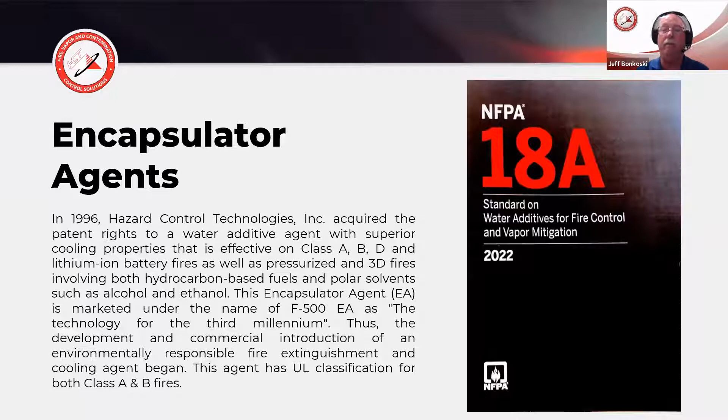So it's this new technology, and it's covered under NFPA 18A. So we do fall into a standard. It's a standard on water additives for fire control and vapor mitigation, and it was recently updated. Here I show the 2022 edition. In this 2022 edition, I believe it is the only standard with NFPA that has annex material that speaks about the use of an agent on lithium-ion batteries for fire control. So we are now in a standard that can address some of those problems.

Within this standard is Section 7.7. It's a minimum test that we go through that shows that we create spherical micelles that are stable in the presence of high heat. So this test in 7.7 is a way to evaluate how the additive F500 is able to render hydrocarbon fuels non-flammable through encapsulation. And we'll talk more about this as we get into it.

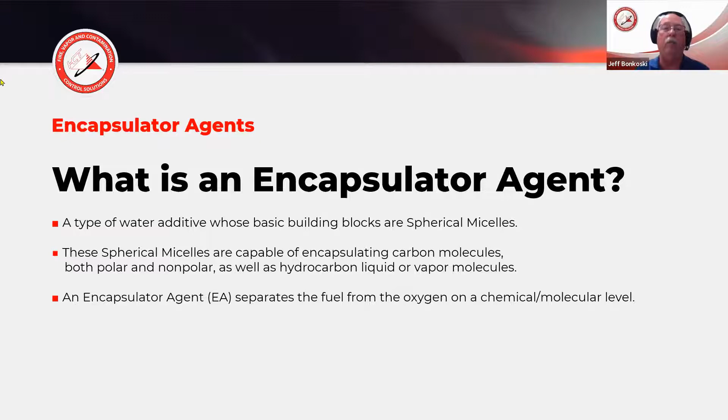So as I mentioned, our basic building block is a spherical micelle. It's not a bubble. It's not foam. Foams work as a separation between the fuel and the oxygen on a mechanical basis. When we look at how a spherical micelle works, we're doing that separation of fuel and oxygen on a chemical, molecular basis by encapsulating. In order to really understand how that's accomplished, here is a real quick video.

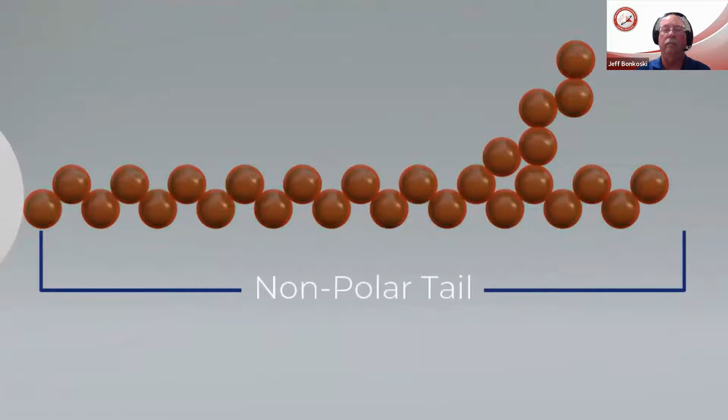Encapsulator technology, the next generation of fire and hazard mitigation. First, we start with a simplified version of a single encapsulator agent molecule consisting of a hydrophilic polar head which loves water, dissolves in water, and a hydrophobic nonpolar tail which fears water and will do anything to get away from water. Once the EA molecules enter the water, they instantaneously and automatically orient with the nonpolar tails inward and the polar heads outward, forming millions of spherical micelles. Micelles travel towards and exit the nozzles, forming EA droplets. Micelles nearest to the surface of each droplet automatically break apart. The nonpolar tails orient outside the droplet with polar heads on the surface, forming an EA skin on the surface of every droplet.

In addition to the EA skin, there are millions of molecular spherical micelles within each droplet.

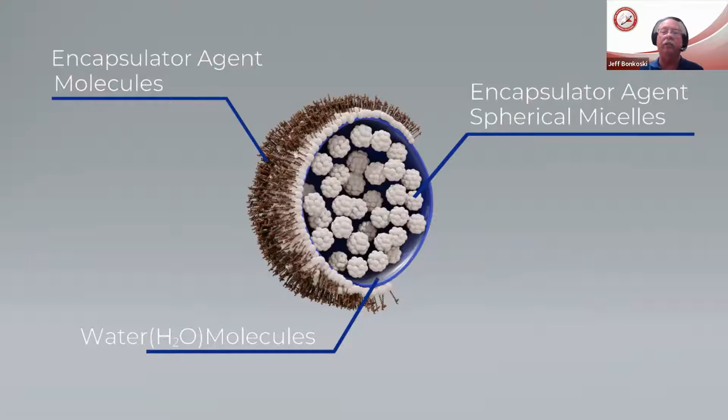So these spherical micelles inside each and every water droplet will perform a function, as we'll see. They're very important, but if you watched any of our other presentations, you understand that the skin we put on the surface of the water droplet actually changes the way that droplet is able to cool and extinguish fires without the creation of heat. This presentation is on spill control, so now we're going to talk a little bit more about what these spherical micelles within each and every water droplet are going to do.

To give you a visual idea of how many of those spherical micelles are within a water droplet, we came up with this to help you visualize. If that water droplet was the size of the Earth, a spherical micelle would be the equivalent to about the size of a pea. So just imagine how many peas you can stick inside the Earth. There's quite a few. So there's millions and millions of these spherical micelles within each and every water

droplet, and what they're going to help us with when we start dealing with different types of situations, fires, soil remediation, spills, is rapid cooling. If we have some type of an ignition source, something that's heating up, that could possibly create a fire situation around flammable vapors or flammable liquids, we can cool those ignition sources. We can encapsulate those fuels and reduce the toxins that are being released when fuels are being burned.

And everybody today is looking for that fluorine-free solution. F500 is that solution. We are fluorine-free. We've been tested by an EPA-approved lab, and it was actually tested for 25 different fluorinated ingredients. The results came back that we had 0 of the 25 that were tested for.

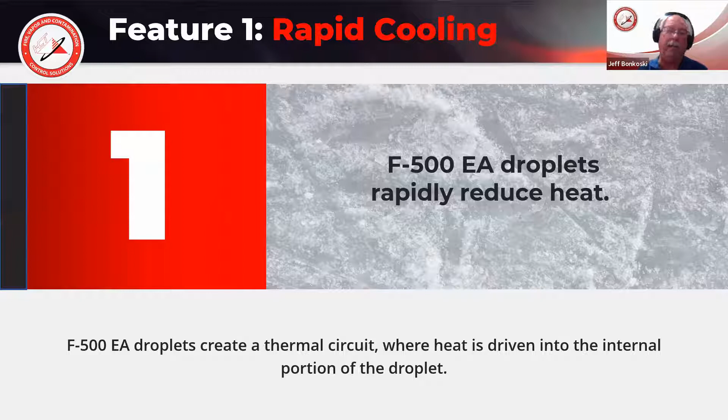So when we start looking at these droplets and how rapidly they reduce heat, again, think about those tails that were on the surface of the water droplet. Those tails act like a heat sink. They drive the heat inside of the water droplet where those millions of spherical micelles are. Those spherical micelles within the droplet rapidly absorb the heat, slowly releasing the heat into the water that's around it.

But through that process, that water never reaches 212 degrees or creates steam. So there's no longer those issues of firefighters getting steam burns, or if we have victims within structures, them getting steam burns as well.

So also, because we're able to cool, if you have a tank truck fire, if you have a fire at some type of a facility where you've got sources that will absorb and hold the heat for periods of time, until that heat is dropped down below auto ignition temperatures, you're going to have that constant worry of a reignition of those liquids until you get down below that auto ignition temperature.

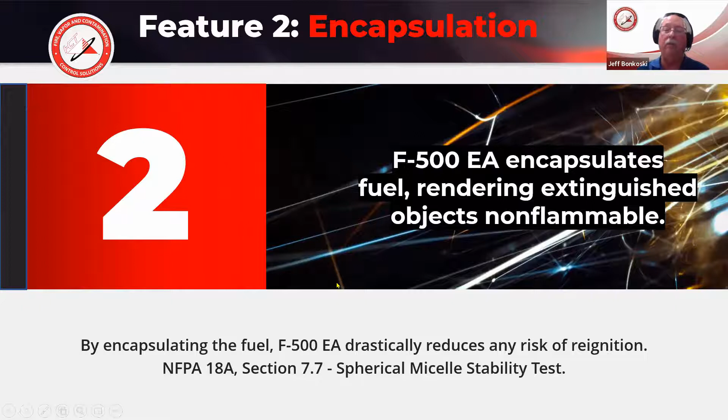So what we're going to do now is talk a little bit about that 7.7, that spherical micelle stability test, and how it's able to reduce the risk of ignition. We need to understand when we see this test, there is a formula. There is a guideline that we have. It's 1 part of F500 encapsulator agent, 8 parts of fuel, and a minimum of 40 parts of water, or a 1:5 ratio. If we want to look at the solution, it's a 2.5% solution.

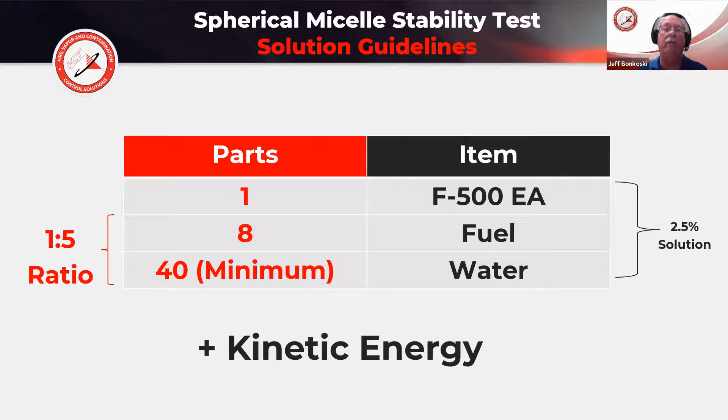When we look at most of our fire apparatus, our inline eductors, our proportioners, they usually go to 3%. So there's a bit of a safety margin in there. The kinetic energy is going to be that water splashing on the ground as we're trying to treat an area that may have encountered a spill. We're treating the ground. The kinetic energy is going to be a requirement. And as we see here in this video,

This is the spherical micelle stability test. Each and every batch of our product before it gets paled goes through this test. This is the NFPA 18A 7.7 test, and we start with a gallon of a flammable liquid, gas, diesel, jet fuel, whatever fuel that we want to test with. We use 16 ounces of encapsulator agent, and we pour that into the pan, and then we will measure out 5 gallons of water.

The kinetic energy that I mentioned earlier is going to be that water that we add as we are timing. The kinetic energy is the water splashing into the pan, and as we can see, we kind of use it to mix it up. So that gives us that kinetic energy that we need to help with the encapsulation. So he's going to time this out for the 5 minutes. I'm going to speed this up just a little bit.

As you can see, there is a milky white discoloration to the water. There's not a lot of bubbles because we don't work on that basis. We work on, again, a chemical molecular basis, not a mechanical basis, making foam bubbles. After he adds the water, though, because there could be some minor frothing, some small little bubbles that might form in the process of adding the water, the solution is allowed to set now for 1 minute.

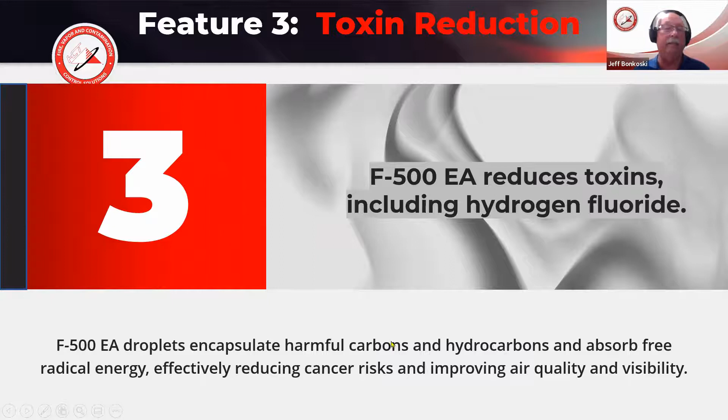And we sit there and we start looking at our firefighter trade magazines and everything. We know that we have lawyers looking for clients in the fire service that have been exposed to our current foams and things that may have been a cancer causing agent that we've been exposed to through our careers. Now, when we start talking about that ability of an encapsulator agent to reduce those carcinogens, it's based on a Clemson University study.

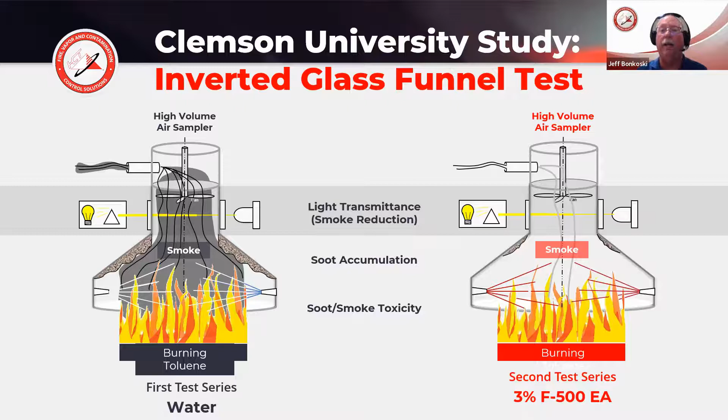And what was done is they took an inverted glass funnel and they ran a series of tests using toluene as the fuel source, spraying plain water through the hood into the smoke column. They weren't trying to extinguish the fire. They were just spraying this water into the smoke column. And then they did a series of tests using a 3% solution of F500 encapsulator agent. Again, spraying through the smoke column, not trying to extinguish the fire.

They found from the use of F500 that they were able to improve visibility by 68%. The accumulation of the soot was reduced by 97%. But where the carcinogens are, the toxins, the things that are killing firefighters, there was a 98.6% reduction in the toxins, which is huge. I know of no other agent that we use in the fire service that can show us these types of results in reducing the toxins and the things that we're exposed to.

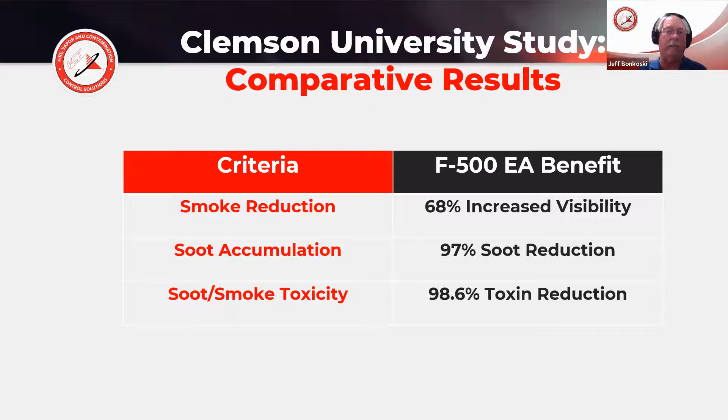So all the things in the fire service that we're currently doing, you know, our second set of turnout gear, our particulate hoods and all the other things, we're being reactive to a problem instead of proactive, where we can now look at an encapsulator agent. Okay, why aren't we being proactive in reducing our exposure to these toxins and these products of combustion as we're entering into these structures?

So as I go on, we look at F500 EA, it extinguishes all classes of fires. You know, the A fires, the B, the D. And let me say, when I say B, it's 2-dimensional and 3-dimensional. And again, I throw out that foam Annex A11 stating foam cannot work on those 3-dimensional fires.

The other problem is the current foams, the fluorinated ingredients. They're not only dangerous to the firefighters, but also to the environment. And I know there's many states that have banned their use. They've done buybacks from the fire departments to get them to stop.

Some states are treating any incident that might involve the use of a Class B foam almost like a hazmat incident, where if you use the foam, you need to write up a report. The report needs to go to the State Department of Natural Resources, and it may have to go to the health department. They're keeping track of this, I'm thinking, for multiple reasons.

And one of them maybe is if, let's say, that Class B foam gets onto some private property, and years down the road, maybe there's some even more strict requirements that come about, and now they find out that that private property is contaminated and needs to be cleaned up. Who do you think is going to be the one responsible for those cleanup costs? It's going to be the fire department that generated or caused that contamination.

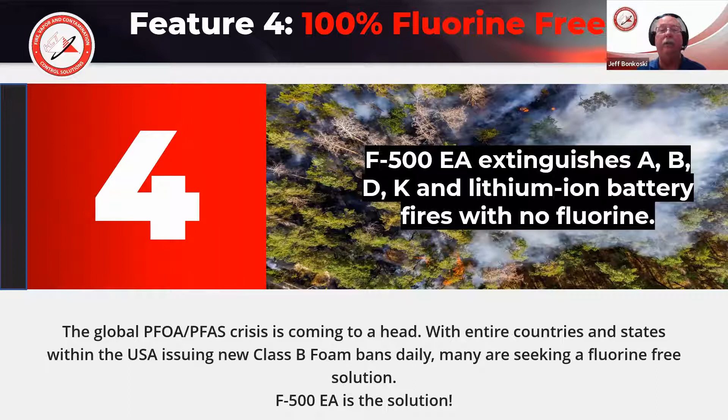So we need to not only think about today, but we need to think about the future as we continue to use these fluorinated foams on some incidents that we're being called to.

So the applications, when we look at encapsulator agents, are basically all the different classes of fires again, and it's polar as well as non-polar. You know, the D, the Class K, transformer fires, lithium-ion battery fires. Our list goes on.

Solar panels, all the things that we seem to be embracing, and all the technologies that we seem to be moving towards to help us save energy or be green, as we say. We're looking for solutions to stay green, but yet we're not really looking at agents to be able to deal with those types of fires.

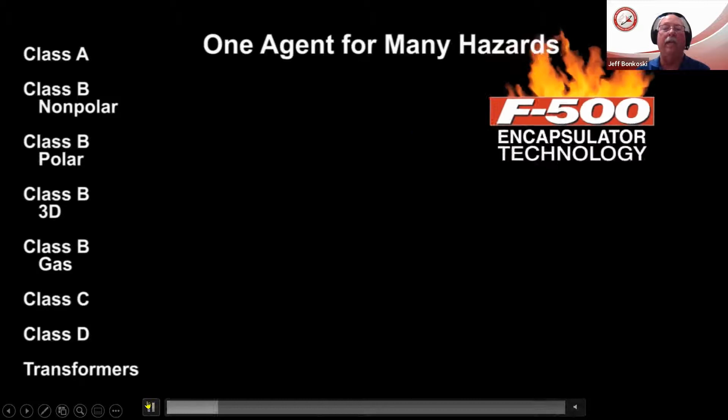Here we have a quick introductory video. Hazard control technology. When we watch this, one of the things that I point out is that if we look on our screens to the left side, it's going to show that encapsulator agent works on all classes of fires. Okay, so we're not having to carry multiple agents on our apparatus.

We look at this fire. I'm going to stop it here for a minute, because here we have a lot of fire. And I mentioned that ability to encapsulate and reduce those soot and toxins. Here's an example. You still have a lot of heavy fire on these tires. Where's the black smoke?

We started to have an effect on reducing that soot and the toxins that are being released by this fire, cleaning up and making it safer. And it does the same when we start looking at our structure fires. But you see here how it works on being able to do just that.

And when you watch these videos, you'll watch video after video where we have chemicals or we have soot, we have smoke that's heavy black because of the materials burning, but yet we're able to quickly and easily remove it. When we look at Class B fires, you often get the special application technique. There is no special application technique other than aggressively fight the fire.

When you watch videos of firefighters doing extinguishing, here's a good one. He changes his water pattern. You see him open a little bit from spray pattern with power cone, but he changes his spray pattern to accomplish what he's doing. He's looking at doing multiple things.

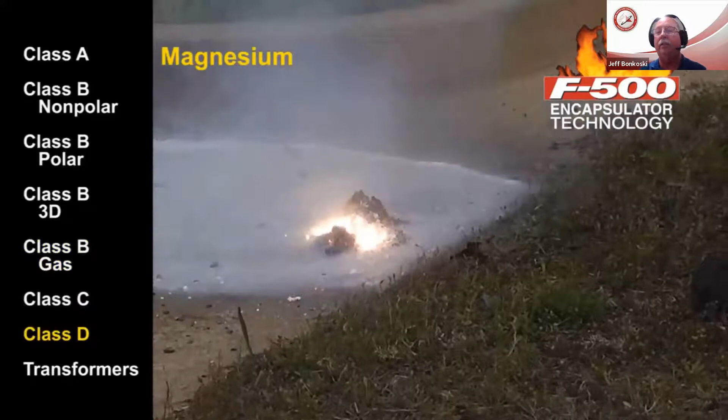Class C, stored energy, lithium-ion batteries. We hear water's the solution, but yet how many times when water's used do we hear about reignition, or 30, 40,000 gallons of water, but we didn't put the fire out, it burned itself out. What about all that runoff? Class D metals. Again, about 380 pounds is in an average vehicle.

Transformers. As you watch this, you'll see that the transformer is not arcing and sparking. Okay, it has failed. So it's now a Class B fire in a Class C environment.

But just a real quick idea of all the different situations that you could safely use this in. And I want to talk about one other thing here. Let's talk about a tank farm fire. I just threw together a little timeline. I kind of got rid of some of the information as far as where it's at, because it's not so much where it's at.

Here is a case history. This started on March 17th. The year doesn't matter, but at a facility, there are 15 storage tanks. There are 3 rows of 5, and right in the middle of this farm, on a Sunday morning, they ended up having a situation. Okay, now it started on Sunday.

Next one goes to Tuesday, and they're talking about the fire crews. They're switching attack modes to try and get control of the blaze. And it's continuing to burn. Day 3, and they're starting to have row fires. Now it's up to 8 tanks that are on fire, because water and foam is not being effective on dealing with a 3-dimensional fire.

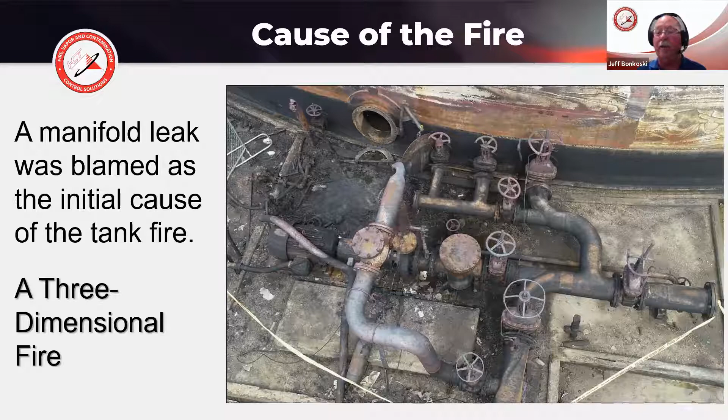The cause of the fire, a three-dimensional fire, was a manifold, is what they initially believe. A fire that, as you can see, for multiple days with foam they were unable to extinguish, yet an encapsulator agent could have been very, very effective. It could have used much less to extinguish this fire and bring it under control, which would have prevented that large spill that caused environmental impact, not only to the bayou, but, as mentioned, into the shipping canal.

So we start to look at the advantages of F500 for use as spill control. And while it's not really listed in here, I'm going to give you another case history as I continue on through. But when we look at the principles of applying it to hydrocarbon spills, right now we're using kitty litters, we're using other types of absorbent materials. They have to be disposed of. In most states, they have to be sent to a disposal site that's approved for these types of chemicals or liquids.

And we understand that the fire department's name, or whoever is disposing of those, gets put on that disposal ticket. So years down the road, if something happens at that disposal facility, it leaches out and people start suing and there's class action lawsuits, they start naming everybody that had anything that went into that landfill. So if you start sending these kitty litters and absorbent materials off to these landfills, you could end up still being responsible.

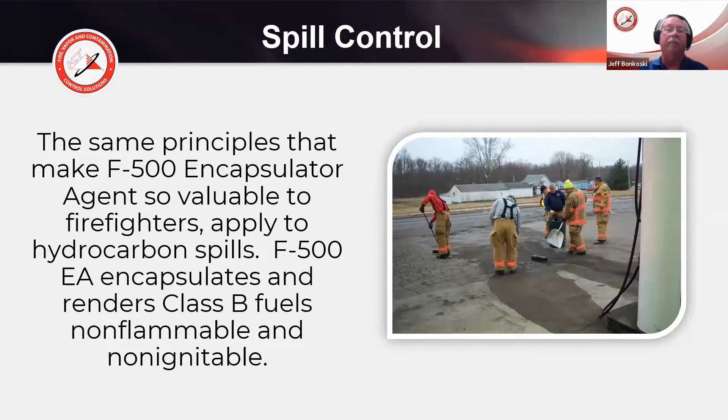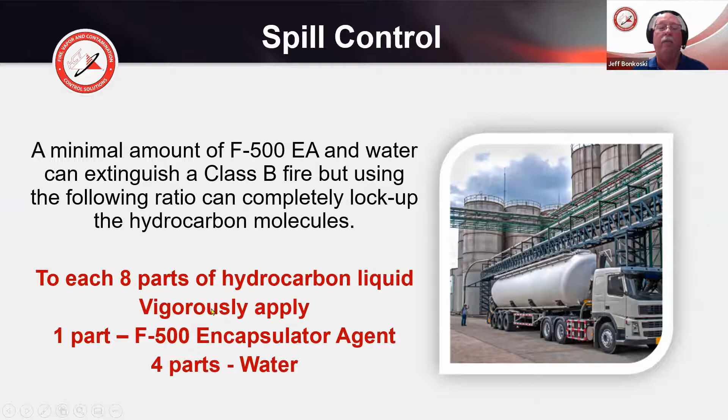Again, minimal amounts of water, depending on the size of the spill. I mean, in some instances, it may not be economical, but in most cases, we look at the formula that's 8 parts of the hydrocarbon liquid, and going to vigorously apply that F500 solution to get that 1 to 8 to 40 mixture, so that we can encapsulate that fuel and render it non-flammable.

When we start looking at these tanker truck fires, and again, being part of hazmat, I've had experience when you start dealing with these. You call all of your mutual aid partners, asking them to bring their foam. You're calling your local airport and seeing if they can bring a crash fire rescue truck. And you're trying all of these things to try to extinguish the fire. And finally, after hours, you finally get the fire out. And you're thinking, you did a pretty good job.

And then you look at some of the news footage. Maybe there's a helicopter that flew over the scene. You start looking at the videos that they shot. And the only thing that you see is the steel skeleton or the steel frame of that tank truck. Okay, the aluminum tank is melted away. So in actuality, you didn't put that fire out. It basically burnt itself out. You had little effect. You spalled the concrete multiple inches and closed down multiple lanes of a highway, so that they can be torn up and

replaced. How many times have you gone down the highway, just a simple car fire? You can tell where it's burned, especially if it's an asphalt surface. You can tell exactly where car fires or trucks have burned up on the highway when you're going down, because we're not able to effectively cool and extinguish these types of fires and bring these LELs to a safe level and keep them that way.

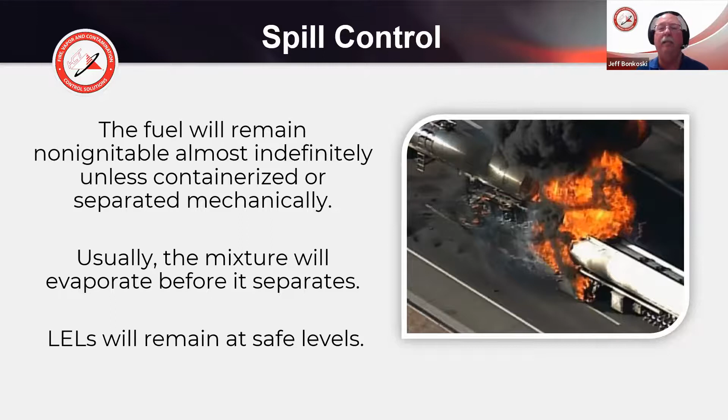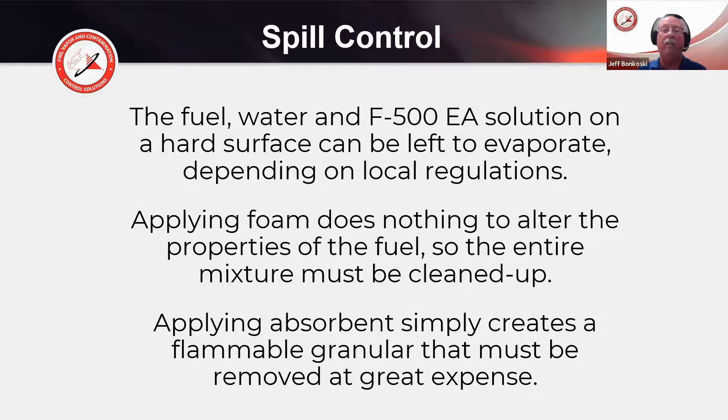So I mentioned earlier, and I'll mention again, the cleanup. You leave it on a hard surface, let it evaporate away, depending on local regulations, but we are listed on the EPA's National Contingency Plan as a surface washing agent. When you start looking at applying foams, again, they do nothing to really alter the properties of the fuel. The hazard's still there. So now not only are you having to clean up the gasoline that was spilled, but you're now also having to clean up that foam that you used to suppress the vapors, or again, those absorbent materials.

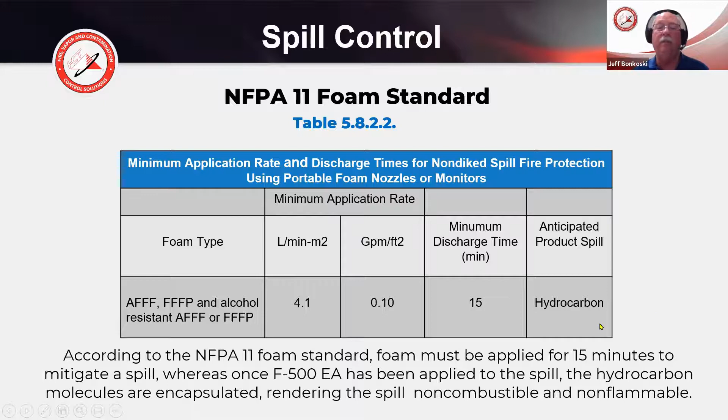When we look at the requirements for applying foam, we need to start looking at our discharge times. Okay, the minimum discharge time, and you look in the foam standard, it's 15 minutes. If you're on a flat spill and you're going to apply foam, let's again take into account that auto accident, you're going to be applying for 15 minutes on that spill, and then you have to maintain that blanket. And if you start having people walking through it, doing their extrication of victims from a vehicle, you need to constantly be reapplying it. So the amount of concentrate that you could end up using could be rather costly.

So we'll take a quick look at it. Let's just take, for instance, a spill. We're going to use an 8-gallon amount as a guideline for this particular slide. And it's going to show how, again, if we think of the formula, 1 part of F500, 8 parts of fuel, 40 parts of water.

Okay, so we have an 8-gallon spill, which means we're going to need 1 gallon of F500 and 40 gallons of water. Yet, we look at the guidelines and requirements for foam, we need to apply for 15 minutes. Okay, and we need to maintain it. So we may have to do multiple applications. But just at minimum for the 15 minutes, we've used 36 gallons of concentrate.

And we've created a mess that we now have to pay to get rid of. So instead of being able to mitigate this with 1 gallon of a concentrate and be done with it, let Mother Nature evaporate it away, we've now created a huge mess because now we've got 36 gallons of foam concentrate in the water. We've got the 1,200 gallons of water. We've still got the 8 gallons of fuel, and you are going to have to pay somebody to clean

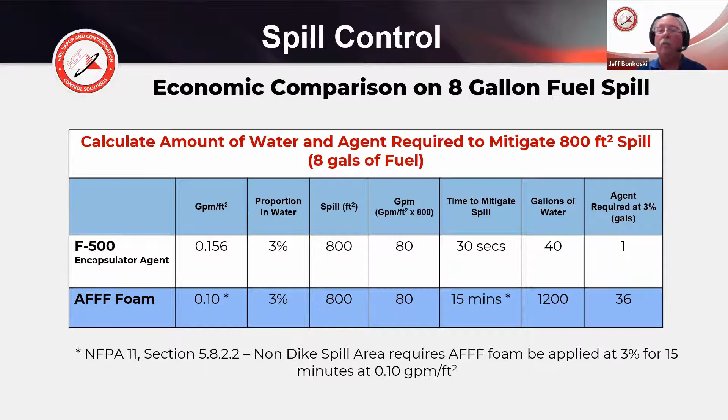it up. And I mentioned, if this is on private property, what's going to happen down the road if that ground is contaminated and somebody may want to sell? So the neutralization, when we look at a foam, is temporary. When we start looking at the encapsulation using F500, we're going to encapsulate it, and it's going to evaporate off.

I said before that I was going to throw out there a little bit of a case history that I was informed of, and I've written up here, and hopefully will be part of presentations later on. But there was an incident at an airport where a gentleman was filling an underground storage tank, and he connected to the wrong tank, and there was somewhere in the area of 3,400 to 4,000 gallons of jet fuel that

was overfilled, because as the jet fuel started to shoot out of the vent pipes, the operator of the tank truck panicked, and instead of shutting things down, he kind of ran off and let things go. So that's why we had somewhere in the area of 3,400 to 4,000 gallons of jet fuel.

A little less than 300 yards away from this spill was the tower for the airport. And the spill went out onto the tarmac, was on top of the roof of this pump house where the vent pipes were, and then in the grassy area where the storage tanks were. So being an airport, crash fire rescue trucks came out. They started to apply the mil-spec foam. Because of the heat of the day, they had to continually reapply about every 6 to 7 minutes because the bubbles were breaking down and evaporating off that quickly.

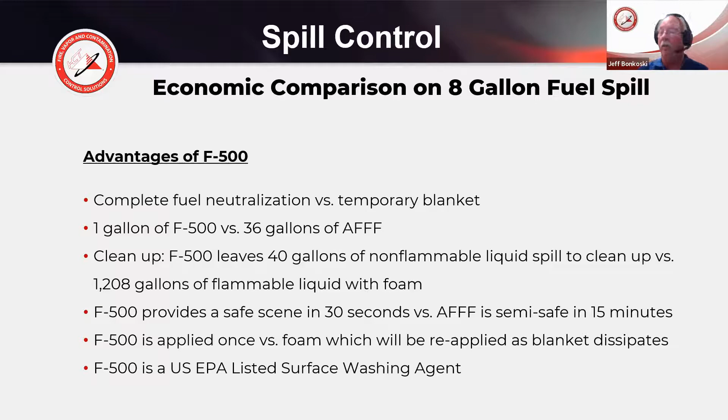But again, it just shows you that they use the F500. The F500 was very effective. It knocked down those vapors, knocked down the LEL, and it helped begin breaking down and mitigating that scene and reduce the cleanup cost immensely. So we follow that guideline. In this segment, we're going to show the F500's capability.

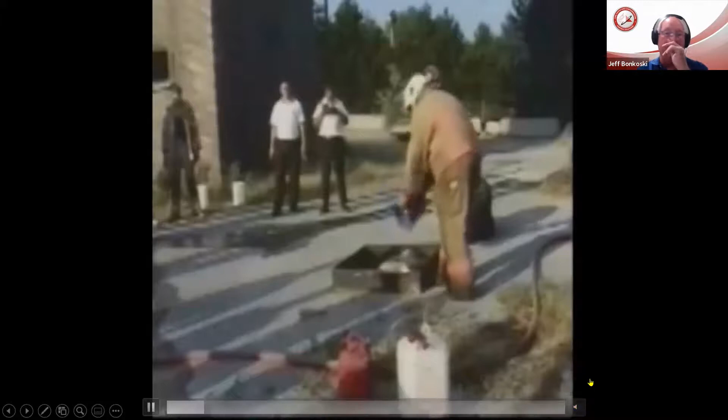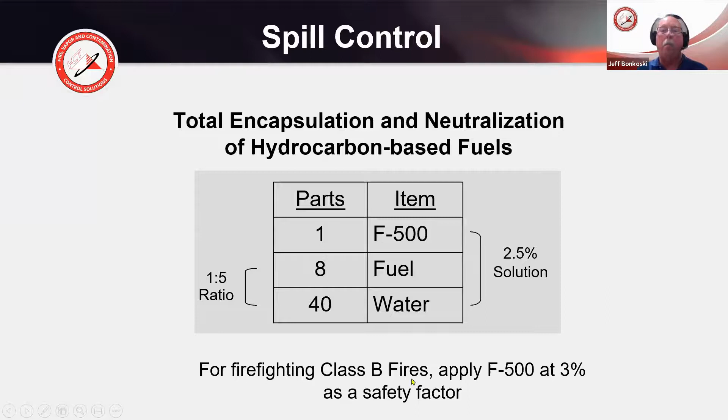And we take that encapsulated gasoline, and we're going to have it thrown on top of those tires. And as you can see, the encapsulated gasoline is quickly and easily able to extinguish those tires. Again, the formula was that 1-8 part, the 2.5%. But with our eductors educting at 3%, we do have that safety margin.

We see in this video, again, a fuel spill, that gasoline that we saw earlier at the gas station where they're using an absorbent on, and I started talking about being able to wash it down. Auto accident where there's a fuel spill and the fire department needs to do an extrication. We see that we've encapsulated one side of the fuel, and when we lit it up, it did not go across from the side that was just gasoline to the side that had been encapsulated.

They come back, they continue to do the washdown. Now, instead of an LEL monitor, they're gonna walk through there with a torch. And you'll see as he walks through, he's gonna stop here in just a second. He's gonna sweep his foot across to show that there's no foam blanket, there's nothing to break, there's no vapors. And now he continues to go across there and show that that has been encapsulated. It's no longer a hazard. Mother Nature is your cleanup.

So we use much less than we do when we try to use foam. Again, using foam or putting that blanket on the surface, we're still having to clean that up. And that cleanup cost may come back and bite us years down the road. So we look at the use of an encapsulator agent and Mother Nature evaporating it off. We talked about that spill with the jet fuel at the airport and the mitigation process, the F-500 being able to have an effect in helping to break it down.

So much less water, because you're not using as much water to be able to extinguish these types of fires. The fines that you would get from the runoff, especially if you're in an area where they have storm sewers and other things that now they have to deal with and try and get these solutions out of, to make the storm sewers safer. So your cleanup costs are greatly reduced.

And not only that, but let's look at some of the other things. If we're on scene for hours and hours because we need to continually reapply the foam and maintain a blanket, and we're instead using an encapsulator agent and encapsulating that fuel and letting it evaporate away, we have less wear and tear on our firefighters, less fatigue. What are some of the main causes of firefighter injuries on a fire ground? Stress, fatigue, tired. Less wear and tear on equipment.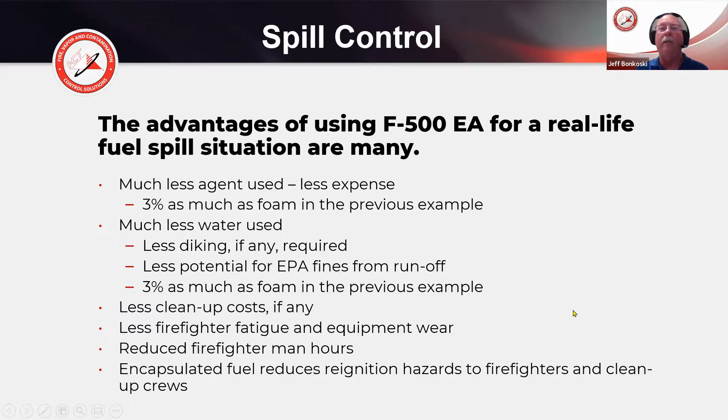Let's look at cost of diesel fuel for the apparatus, our trucks. So if instead of being on scene for 4, 5, 6 hours, we can be on scene for an hour and a half, how much less diesel fuel have you just used? What is your savings? So there's many benefits to using an encapsulator agent when it comes to dealing with these spills, when it comes to being able to mitigate and take care of these types of spills.

So, we talked about those class B and D, and we can actually throw in hazmat here because, in Chile, we had instances where F500 was used in the hazmat to mitigate a sulfuric acid spill. So there's benefits in other applications as well.

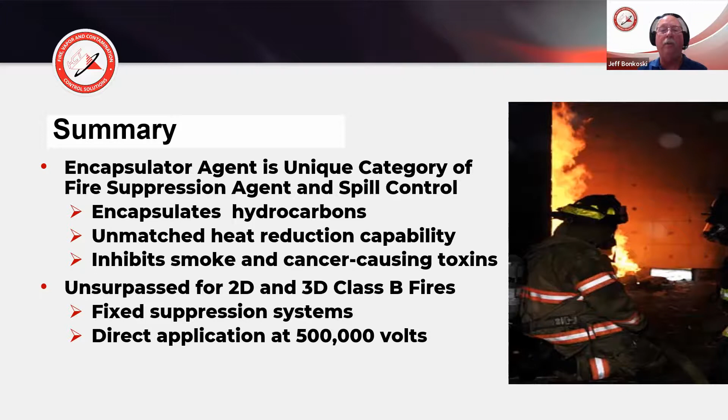But when it comes to those 2-dimensional and 3-dimensional class B fires, we can also now even look at our fixed systems, okay, where we have sprinklers. I mean, how many times in the last, well, I could probably cut it down to like the last 3 months, 2 months even. We had a Walmart distribution center. We just had a couple of Home Depots that had fire.

I mean, we keep hearing and reading and seeing about how these fixed systems in our buildings, while they activate, they're not really doing much. We were still losing buildings. We're still losing millions and millions of dollars because these systems aren't being able to extinguish the fires.

But now if we again think and start adding an encapsulator agent into the water using our concentrate control system or our water driven proportioners, our Dosatrons, these could be used to feed multiple risers, protect multiple areas of a facility, a warehouse, a refinery. Again, when we look at vapor mitigation, vapor control to prevent fires and explosions from even occurring.

I mentioned earlier in the presentation: can anybody name for me an agent that they have in the fire service or on their apparatus that works to control or eliminate flammable vapors and prevent these types of explosions? Now, after this presentation, you have that tool in your toolbox. If you start to embrace and learn about encapsulator agent, we can help you with those types of situations as well.

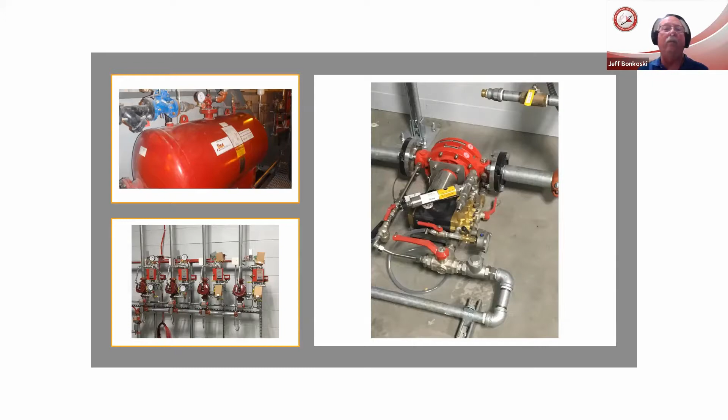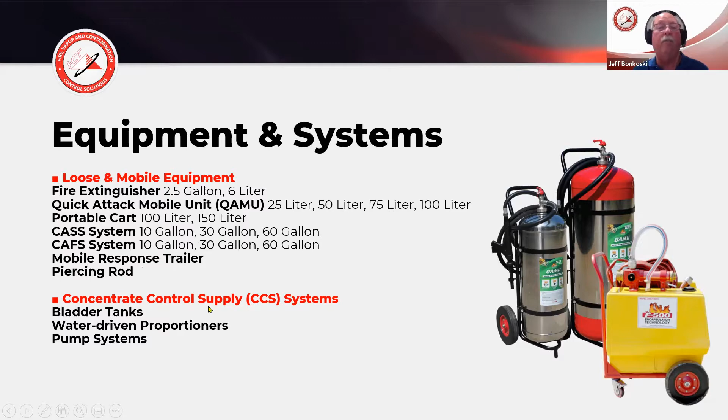I mentioned the one utility company. They have 3, and I believe they're getting ready to order 3 more. They have them scattered around the state where they have their facilities, and they make their trailers available to the fire department. In fact, in most cases, these mobile trailers are stored at fire stations so that they're right there and ready to go. So we talked about all the different apparatus and ways that we can get you into the sprinkler systems and help you out.

Some of the other areas are consulting and training. While we basically show you the hazard analysis, the emergency response planning, we're also available if you start looking at lithium ion battery fire protection for BESS, battery energy storage systems. We can help and consult and train.

I know when I watch a Tesla burn up and you watch the interview with the firefighters, one of the first things they talk about is we need more training on lithium ion batteries. Well, you know what? Let HCT help you. More than happy to work with you in getting some training and sharing with you the reports and the things that we've learned on how F500 is able to work, because again, it ties into that flammable liquid.

Okay, the electrolytes that are in those batteries are a flammable liquid. One of the reasons why water is a failure is because it doesn't do anything to eliminate that electrical hazard or that flammable hazard. Okay, F500 does. We encapsulate the flammable liquid in the electrolytes, so we can have an effect as well as reducing the HF gas that those batteries release.

So we work in many different applications, and I know all this was supposed to be based on our spills and things like that. I went off and maybe covered a little bit more than that, but again, I said early on, I was hoping to make firefighting a safer profession. So through this, I wanted to make sure I covered a little bit of everything, as well as that flammable spill control and environmental issues.